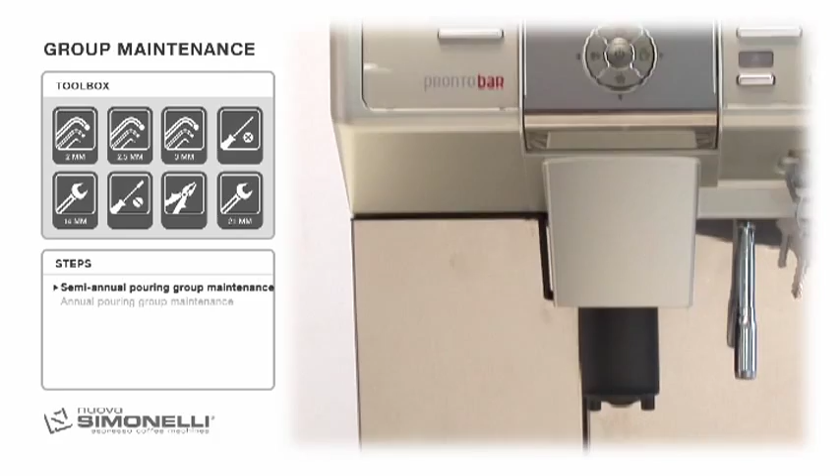Pouring group maintenance. Semi-annual maintenance. It is recommended that the group has routine maintenance every 6 months or 25,000 pouring cycles. Follow the maintenance checklist instructions.

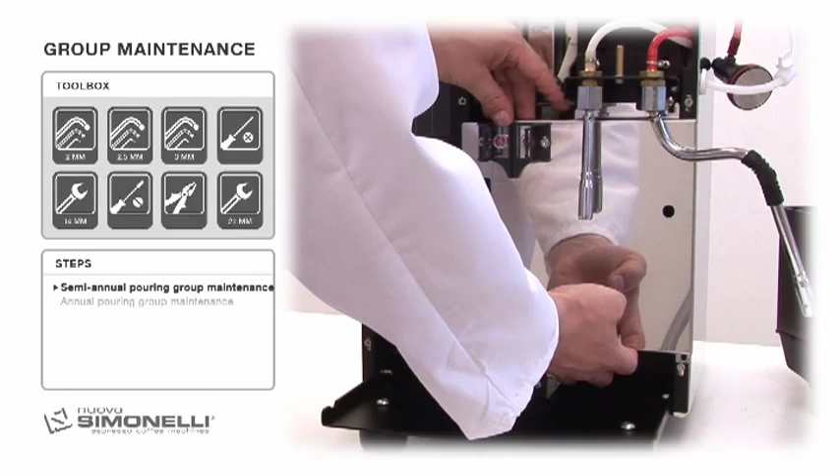Remove the front panel by loosening the 4 screws. Switch off the machine at the mains, pressing both the up and down arrows. Turn on the machine at the mains. The display shows manual movement.

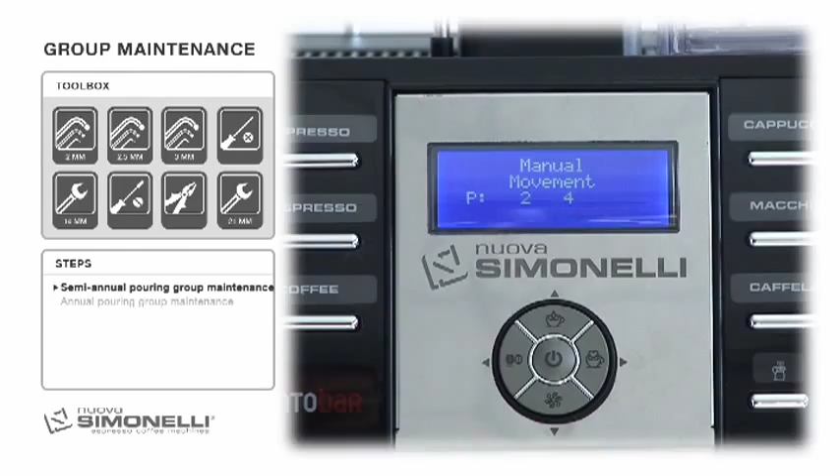Open the front door and remove the grounds drawer and tray. Top piston: remove the nozzle from the pipes. Remove the upper piston clip.

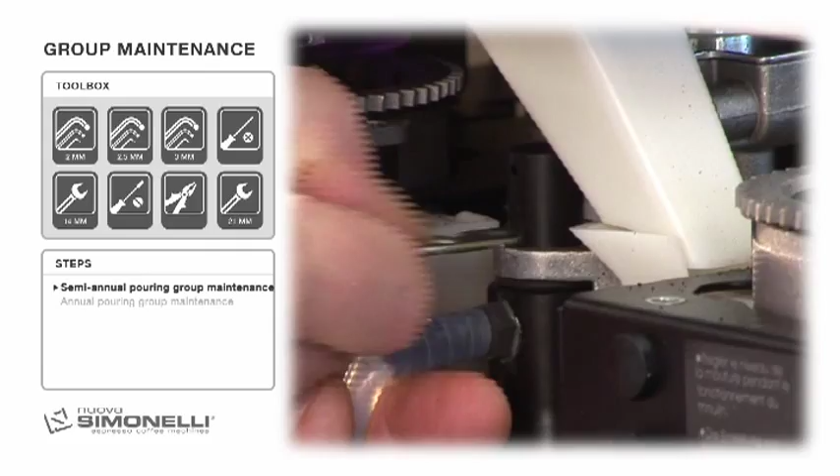Clean it and replace the shower and the seal.

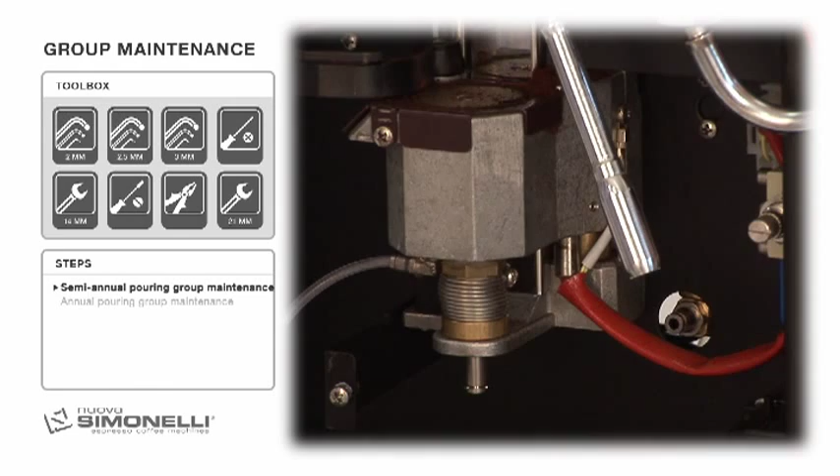Lower piston: press the down arrow and move the lower chamber. While holding the ring, pull on the delivery pipe. With pliers, remove the bottom O-ring. Press the up arrow and remove the springs.

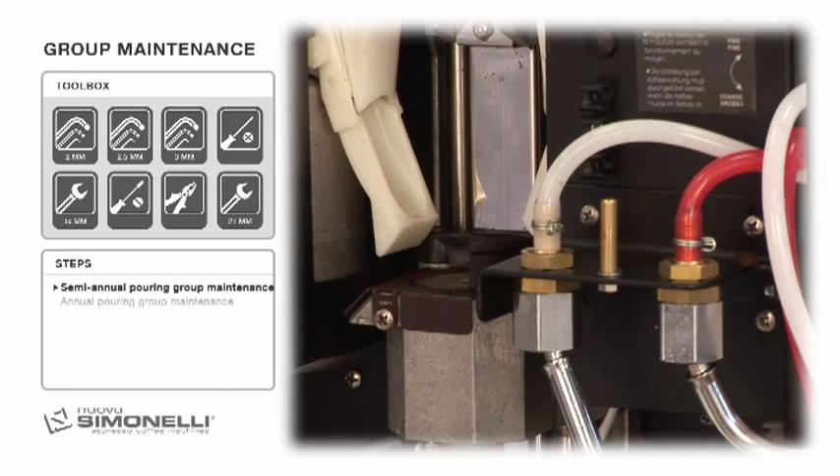Press the down arrow and let go before the blade begins to be expelled. Remove the central O-ring from the lower piston shaft, and from above, undo the piston.

Clean the piston and replace the shower. With a 21mm wrench, undo the screw that holds the seal. Remove and slide out with one finger, then replace it.

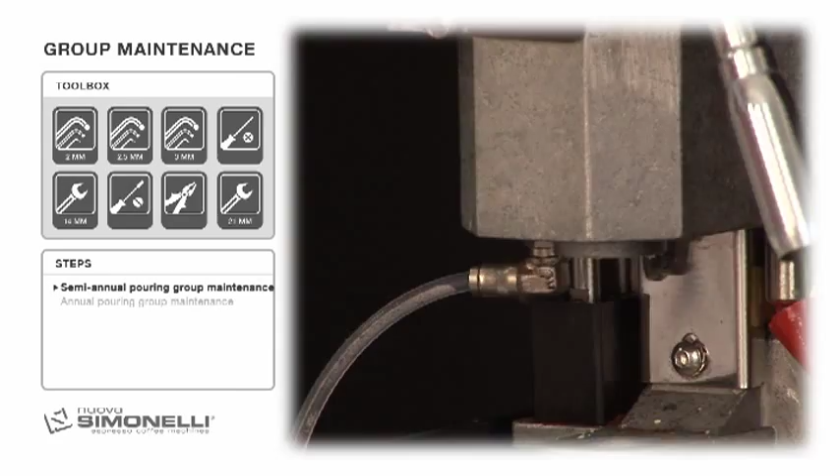To reassemble, use Teflon spray in the screw thread. Add the new seal and lubricate. Tighten the screw, but not fully. Thread the lower piston and completely tighten the screw.

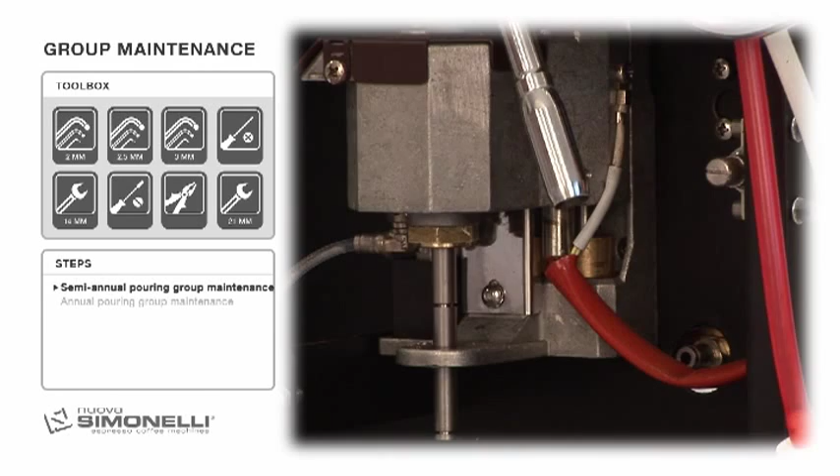Check the free movement of the piston. Insert the O-ring in the middle of the lower piston shaft. Press the up arrow key and insert the previously assembled springs.

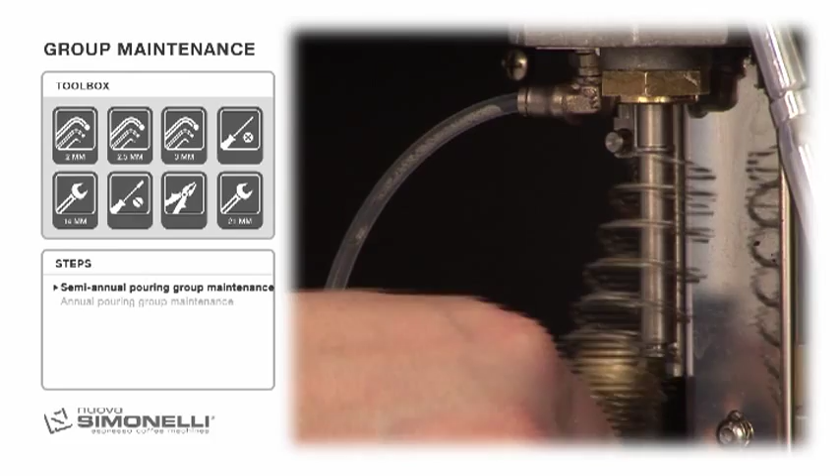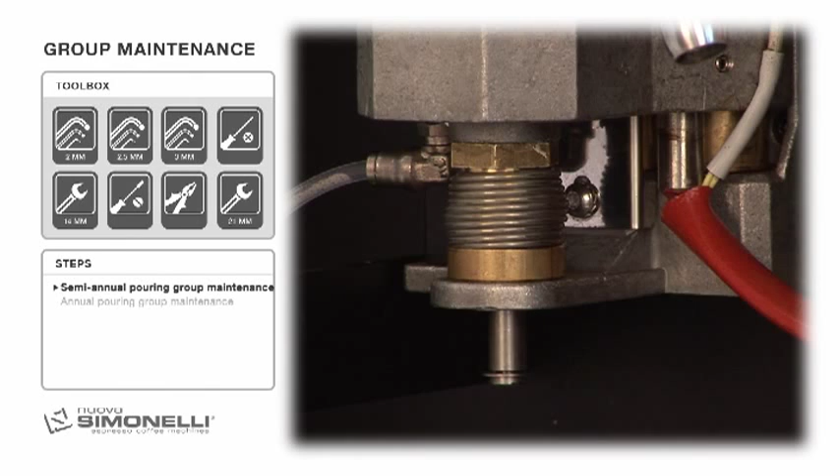Press the down arrow to lower the chamber. Let go when the piston is about to enter the bottom support of the spring. Insert the bottom O-ring. Cleaning runners and lubrication.

Clean the runners with a damp cloth and mild degreasing soap, moving the chamber up and down to remove dirt from all surfaces.

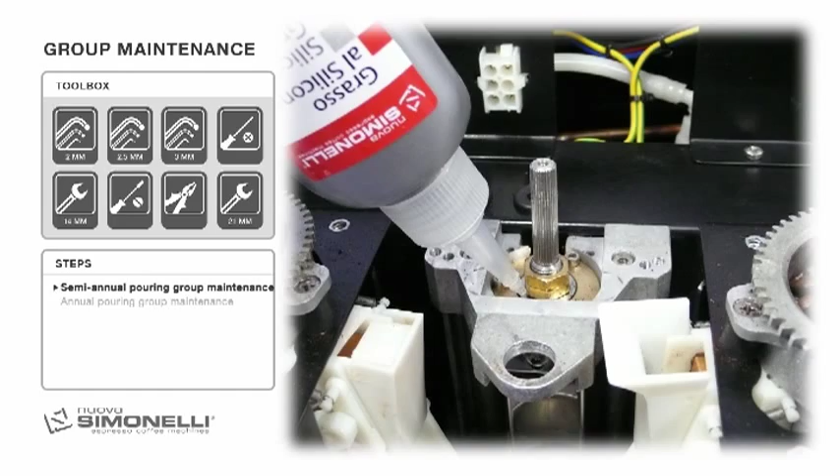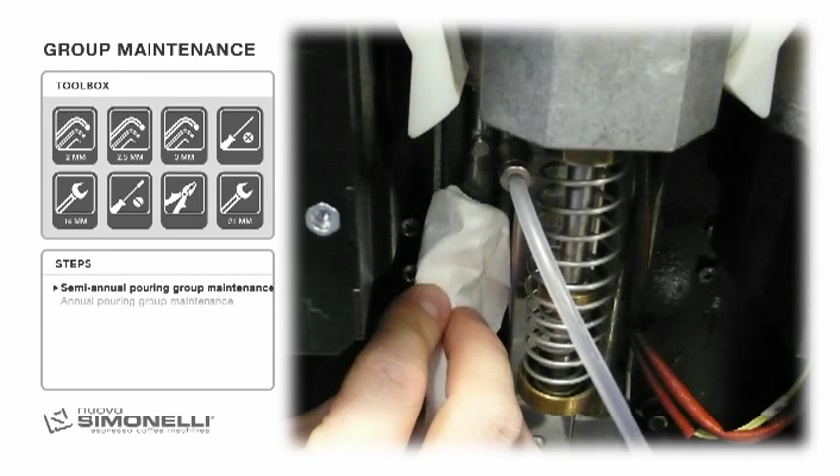Use Nuova Simonelli silicone lubricant on the screw worm bearings. Lubricate the infusion chamber bearings with Teflon spray and dry the runners with a cloth. Lubricate the worm near the infusion chamber bushing with Teflon spray.

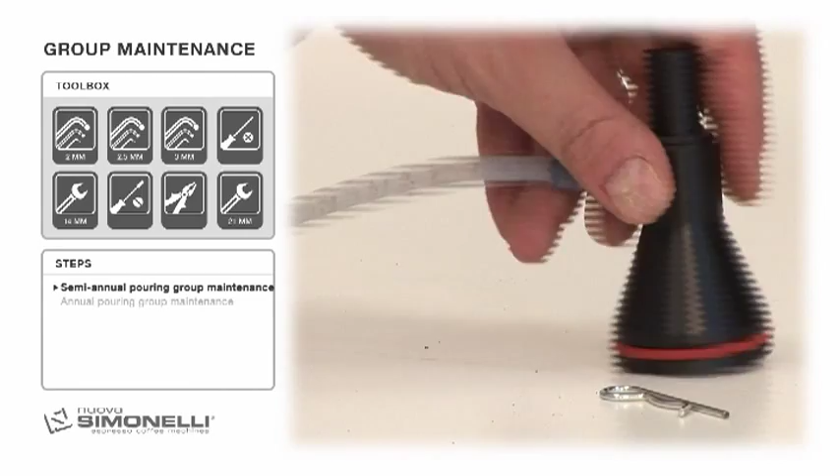Reassembly: insert the Teflon pipe into the fitting. Insert the piston and secure with the clip. Move the chamber up and down to check the correct alignment of the pistons.

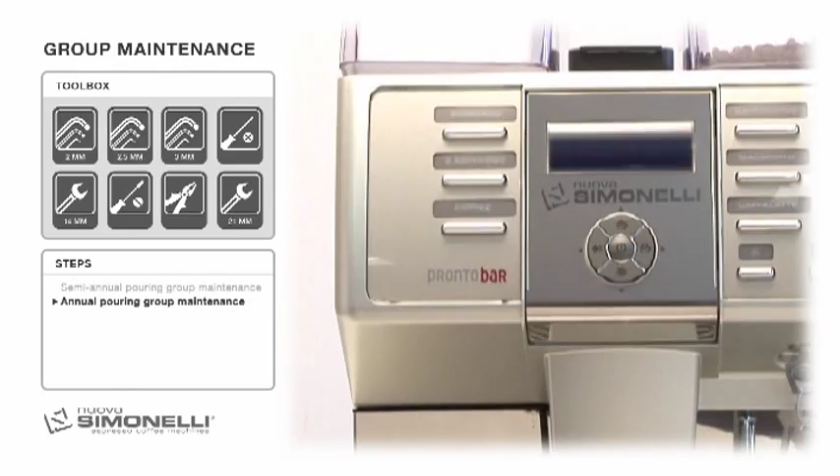Annual pouring group maintenance. Every year, or after 50,000 cycles, the group should be replaced with a new or reconditioned one. For reconditioning, follow the maintenance checklist directions.

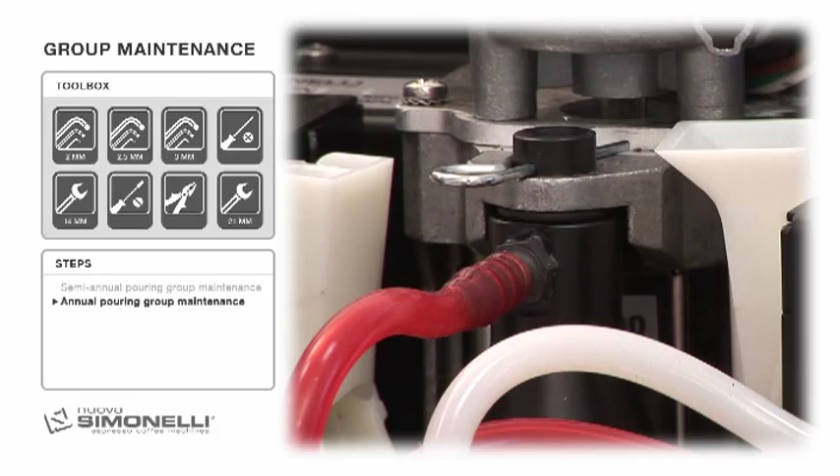Remove the nozzle, clip and top piston of the group. The service engineer will then remove the pouring group and motor. Remove the components from the group.

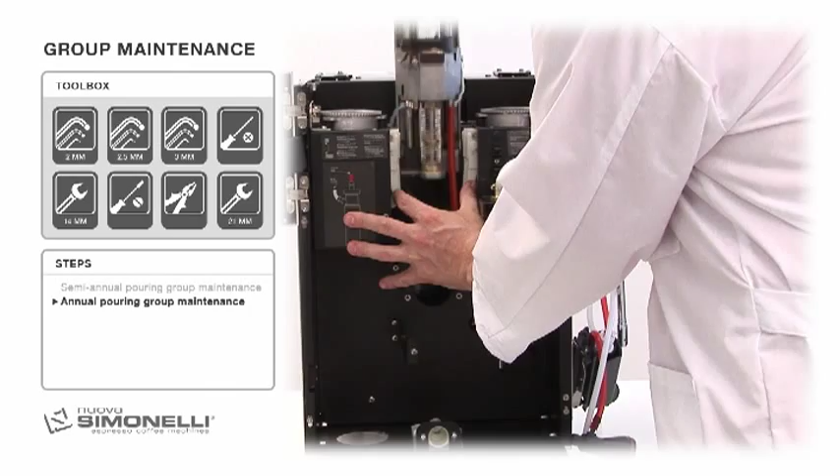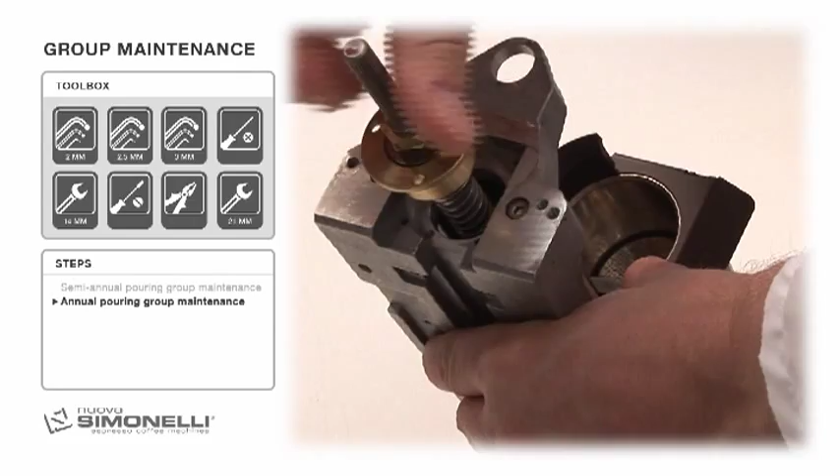Release the worm screw by undoing the 3 2.5mm Allen screws on top of the support group. The worm screw is at the back of the infusion chamber. The bearings are part of the worm screw.

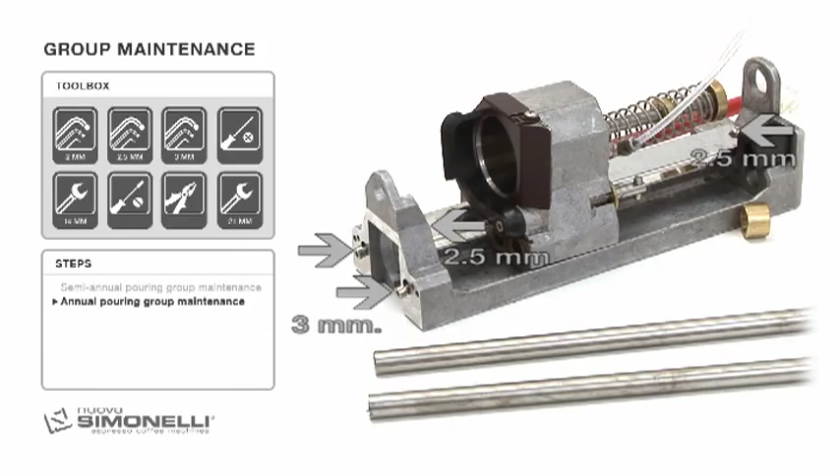Pull out the 2 runners by removing 2 3mm Allen screws and the 2.5mm one on the worm screw cover. To remove the blade ejector, it's necessary to undo the screw with a 3mm Allen wrench. The spring is secured to the blade ejector shaft and infusion chamber.

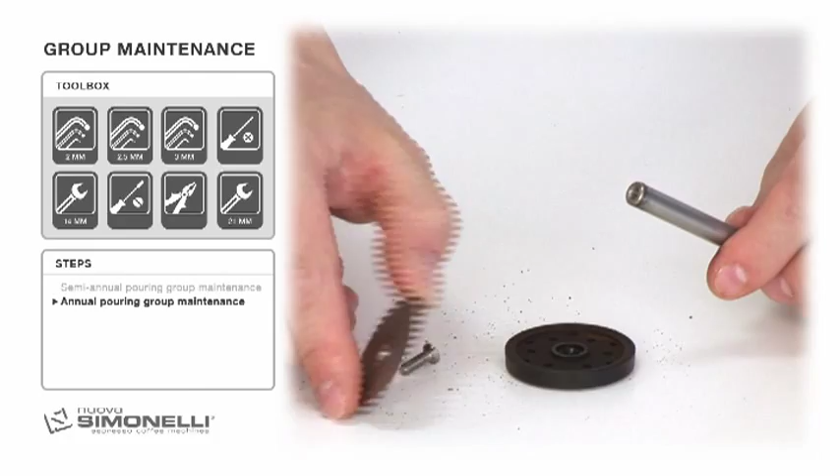Wash everything with water and degreasing soap. For a detailed overview of these actions, please refer to previous sections of this chapter.

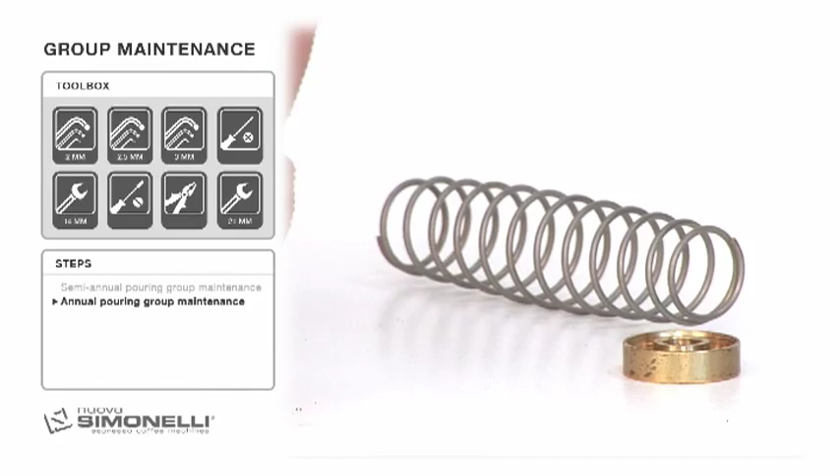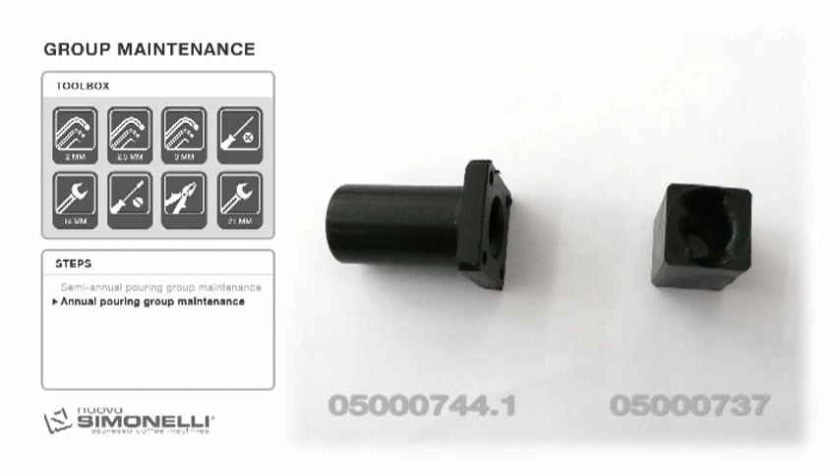Reassembling pouring group and substitute parts. When reassembling, the service engineer will replace the following components and anything worn: top and bottom piston seals, top and bottom piston showers, blade expulsion bushing and movement screw, and blade expulsion spring. The average time for annual maintenance is about 2 hours.